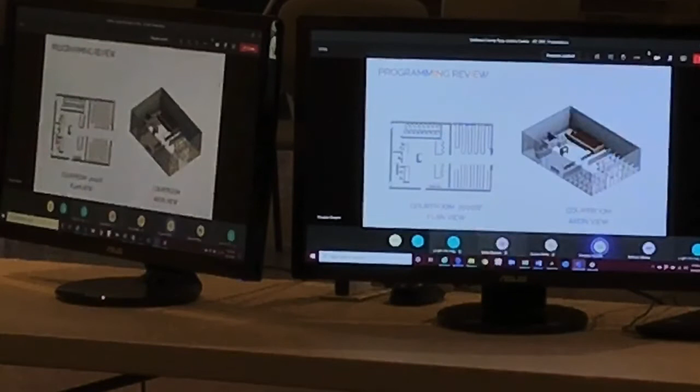So everything that the public would be engaged in, including attorneys, we're making provisions to give ADA compliance. So we have space for wheelchair seating in the gallery and the jury, accessible ramps to the witness box and the jury box. Even the clerk's positions are all accessible within the room itself.

We have a second kind of judicial space, which is a smaller hearing room, kind of a multi-purpose space, but again, similar logic in terms of how it's going to be designed and laid out. This is a simple plan axonometric of how that space might work.

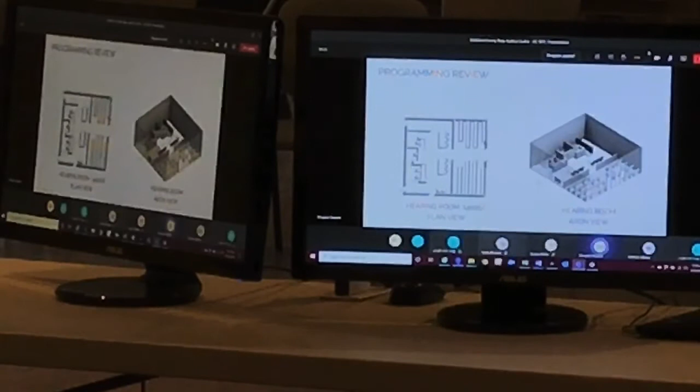The other large space within the building is a jury assembly. That breakdown includes a check-in station, a small kitchen, and a variety of spaces for potential jurors. There are some carrels, and some more auditorium style, maybe incorporating some lounge seating in there as well. But we find these to be kind of multi-purpose.

These spaces are going to have the capability for audio visual in there. They get used a lot for training. There are a number of functions, really a nice asset for the county to have and utilize in a number of ways. But it is also the cornerstone of the juror experience, and they're part of it in the building.

Any questions about the basic program? Again, we can make those spreadsheets available, and we can drill into it if you'd like to. But round numbers, we're looking at 56 to 58,000 square feet total square footage to get everybody in one new building that has capacity for growth.

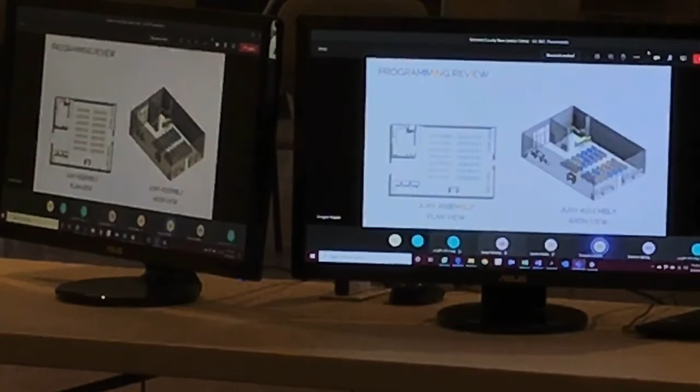Let's keep rolling here and look at the site, the parcel. Linda, I don't want to put you on the spot, but do you want to maybe just do an overview of our analysis of the site? Sure, I can.

Currently runs through the middle of the site, including some overhead power and sanitary sewer lines that will have to be relocated no matter really what building we do.

And then we always had the question, will our buildings that we're programming out, and the parking needed for it, actually fit on the site? So we looked at it from that standpoint too. Will everything actually fit?

Trying to find the most efficient building layout, we did a study of the amount of parking we think we will need, and we analyzed that in three different ways. We looked at what we typically do for courthouse projects, because we've got considerable experience throughout the country that we can use as comparable. Certainly Haywood County is one of them.

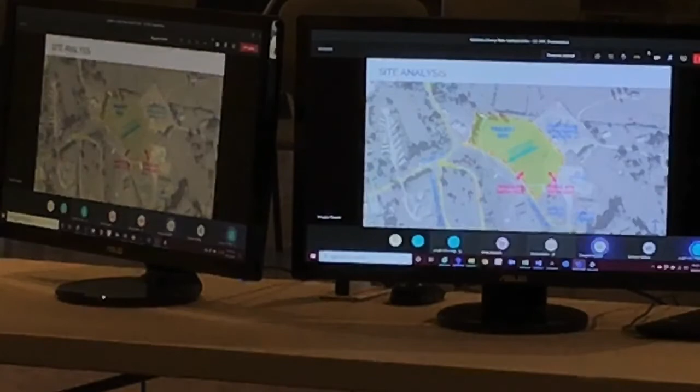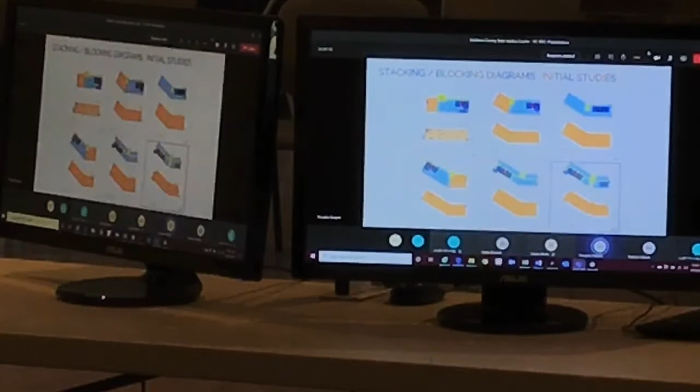So let's look at how some of this might come together. We studied a number of different ideas, a number of options that looked at how you take your base program and put it together in a functional, efficient footprint.

Again, we're conscious of the slope, so we're envisioning the buildings kind of nested into the site, and we're using part of the building to, in effect, retain. It would present itself as two stories perhaps on the street frontage, but on the other side might be a single story. Then we're just trying to be efficient about how that would work.

It lends itself to these linear options, and it also lends itself to a division that might be logical or at least obvious. In these diagrams, the orange colors represent the sheriff detention, the blue colors represent the courts, kind of simplistic, just courts and court support, and the yellow being the public circulation.

For us, it made sense to take that detention and the potential of some of the sheriff's operations and place those on the lower level, and then have the courts on an upper level. We also looked at...

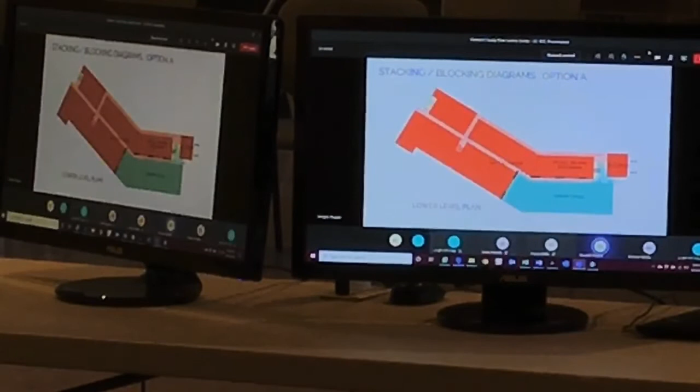We have programmed the Sally Port to maintain secure movement in and out for this. In this case, the Sheriff's Department, the Sheriff's Office proper is placed on this lower level. And there's some advantages to having them and their parking, their need for separate parking, segregated to a lower level.

That also translates into the plan. Here's a three-dimensional view of that diagram. We've now turned your orientation, so you're looking at it as if you're uphill, and you see the two floors. We have provided stairs for exiting, and there are some elevators to move...

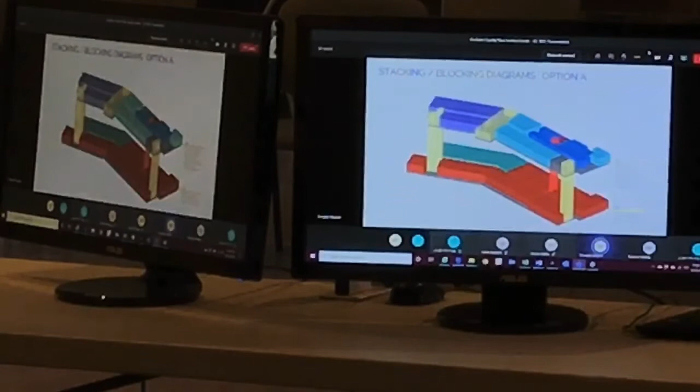Some movement up and down depending on how we're servicing the building. Again, we have the courts. There's a dedicated elevator in the red zone that would bring custody up to the courts, and it's actually in a shared spot between the court and the hearing room. That's really our best practice. We keep everybody separated: public, staff, as well as in-custody movement. Everybody's separated, and they really would only come together within the courtroom proper.

And so that's option A. Option B is very similar organization. It's just a more straightforward, linear configuration.

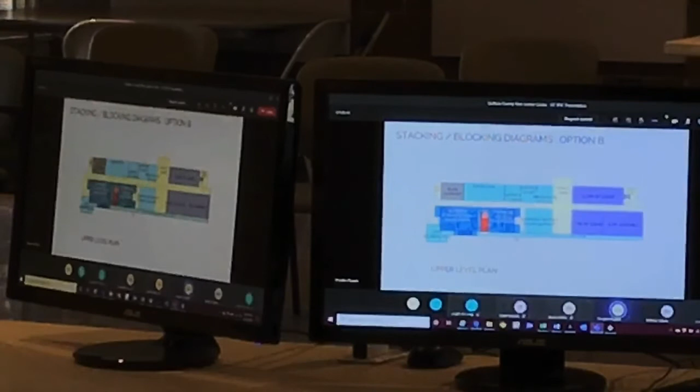Again, the courts on this bar, we have the requisite chambers, some support space, dedicated circulation so that you can move from chambers into court. You don't pass the public realm. The clerk can move in a private circulation to the court. And again, it's all about maintaining secure operations for each of the different populations that are moving in the building.

And then this has the same organization about the jail and the sheriff on the lower level. So here it is in a linear configuration, option B.

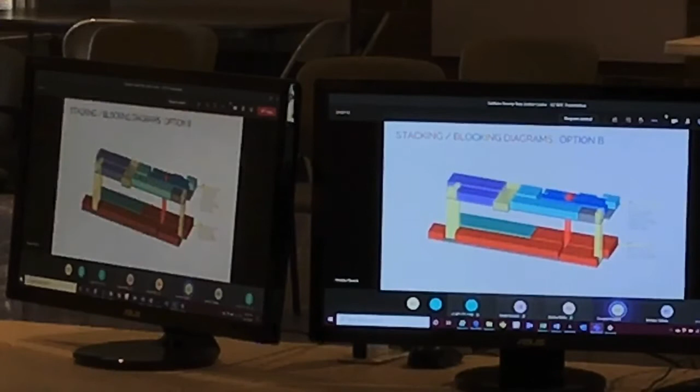Again, we've looked around, kind of looking at the entry side or the top side of the building. And then we also looked at a way to organize the building that is maybe a little bit more sympathetic to some of the contours. So this places this angular form with the same organization and same distribution.

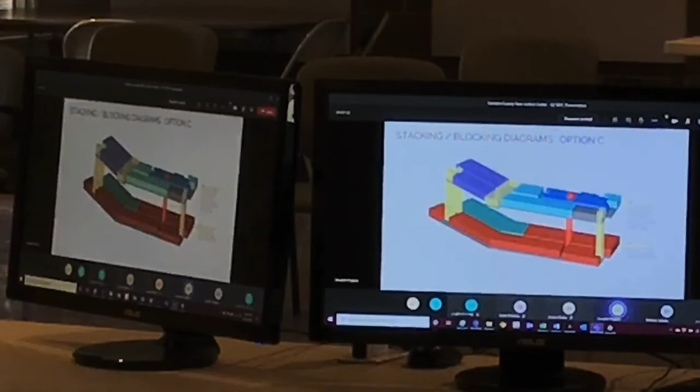So let me show you how these all come together. And we looked at how to best utilize the site. And we studied a number of options. But where we landed was to place...

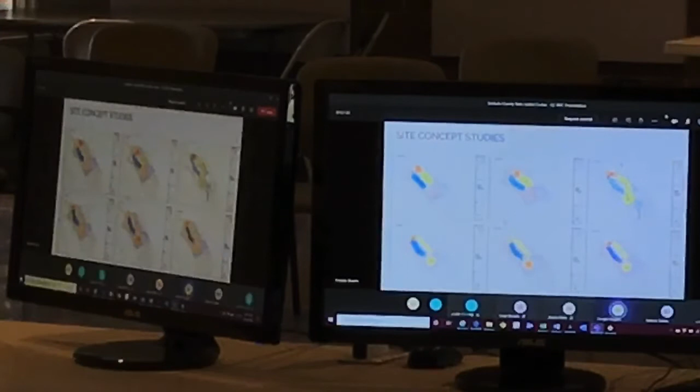Here those three footprints now illustrated to scale on the site, as well as the square footages associated, or the footprints associated with the requisite parking. And diagrammatically, the way this works, there's kind of an upper shelf or upper tier that takes the access...

Really off of that leg that comes by the senior center, the mid-site, if you will, and it's up high. And so we get a plateau or a shelf of parking that's up high. The building is then accessed at the second floor. You drop down with the contours for the lower floor, and then that's served by a lower parking lot. That's where we also separate our...

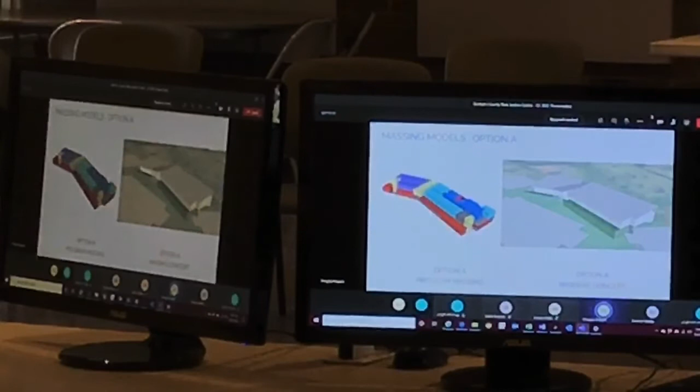Starts to look at how that massing might come together, where we have a single story. This now looks at it from the parking side. So a single story on the upper level, double story on the lower level. You can kind of see how the building bridges between high and low. It's pretty simplified massing modeling.

But a couple of things I think to note is that it takes a good deal of the site. There's not a lot of leftover. I think there is room to expand. I think there's things you could do to grow this building on the site, but we are using a good chunk of it in order to satisfy these programmatic needs.

So we actually looked a little bit harder at these next two options. We're going to take a little bit further dive into how they might be developed. The logic, again, has this double-loaded bay parking on the higher shelf, all funneling to a primary building entrance. And then the main facade is out on the roadway.

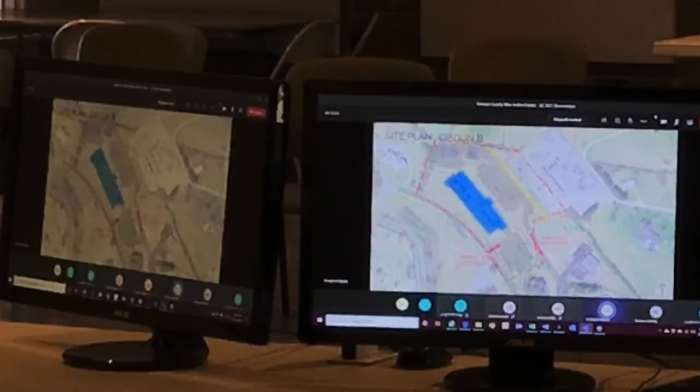Again, this is still preliminary, but the idea of introducing that colonnade that announces the public entry from the top. These views are now from the public side. Clearly, it's a single story up here, and everybody's funneled to the primary public entrance.

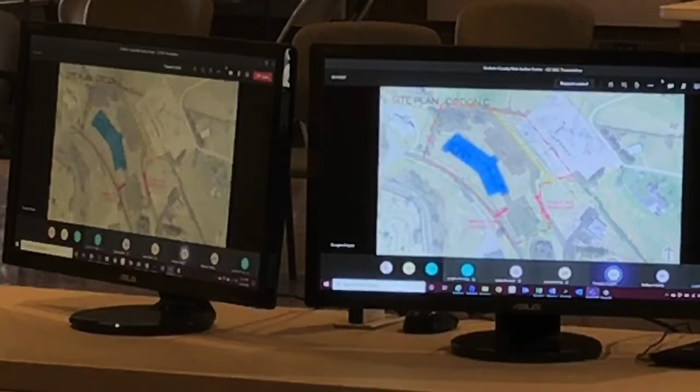So the little wrinkle here is this: it's hard to represent, but the contours actually have this kind of natural bend, not unlike the bend in the road. So this is tuned to that, so the lower footprint of the building on the lower level nests perfectly into the contours of the site. We'd have to verify some of this data since it's extracted from a couple different places.

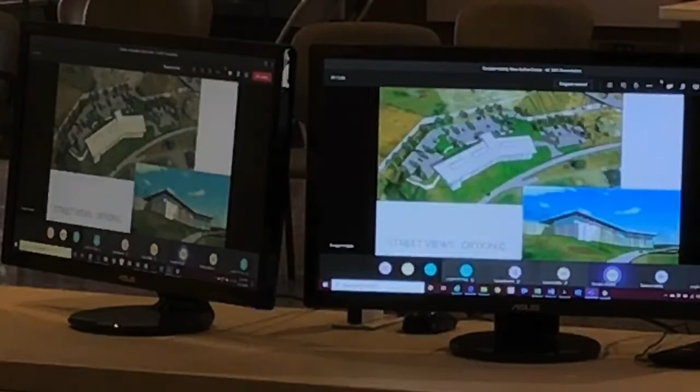On the public side, we're announcing that entryway as a separate form and mass with columns—that's the collector that brings it all in. We studied in this model the idea of sneaking some clerestory lighting along the public spine within that upper level.

There's lots of room for us to develop these architecturally, but what excited us is that there are really interesting ideas that could work with the building form and the site. They lock together in a way that makes sense—it's a pretty efficient use of the site. We believe this may be one of the most efficient ways to fit the program on this site, and it's a logical separation of courts versus the detention and sheriff's component.

That is our analysis to date.

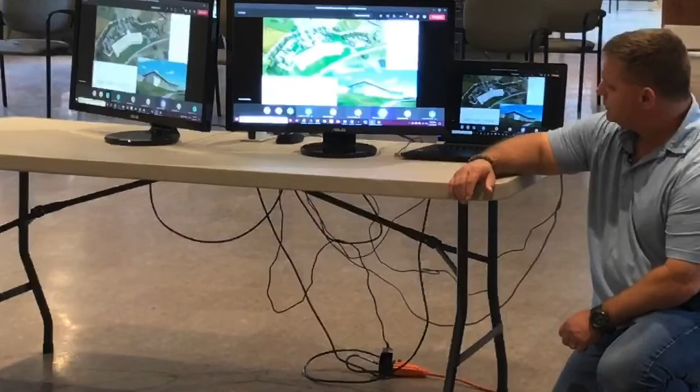But we were looking at a combination of that masonry, where we could introduce some of that stuff, part of the existing court, and then areas of glazing in between. So again, more of a punched masonry, and that would lend itself to how we would introduce the smaller scale windows associated with the detention at the lower level.

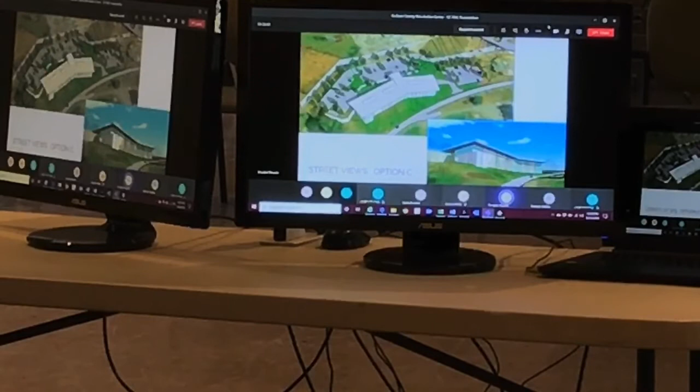And so that's the other thing that this plan does, there's this little bump on the plan. That is our jury deliberation suite, which again, when we think about courts, we think about honoring how the public are participating. So it's nice that we have this space out there that gets lots of light for them, and honors and celebrates public participation in the process. But I think there's a lot of room for how we can develop that expression along Fort Hill.

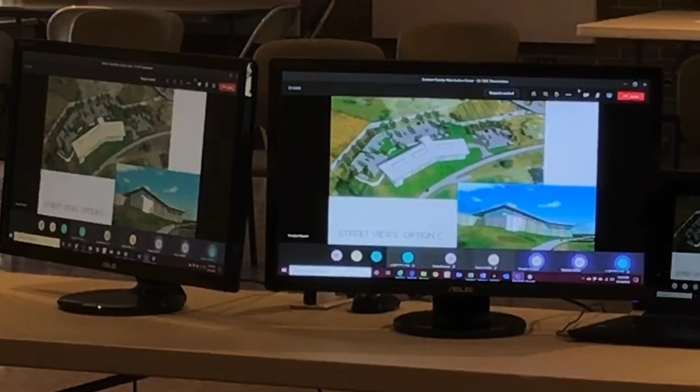I don't like that. I don't like the front of the building, it basically looks like the back. You're going to have a big retaining wall, and above there you've got the Duke Energy substation. To me, the street side of that building should be the side that says, hey, this is the Graham County Courthouse, instead of having to drive around behind the building.

That's certainly something we can look at and talk about, making it more appropriate for a look of Graham County and the court system as you drive up the hill. We could look at the facade having some attributes of that, correct? I can see it from here.

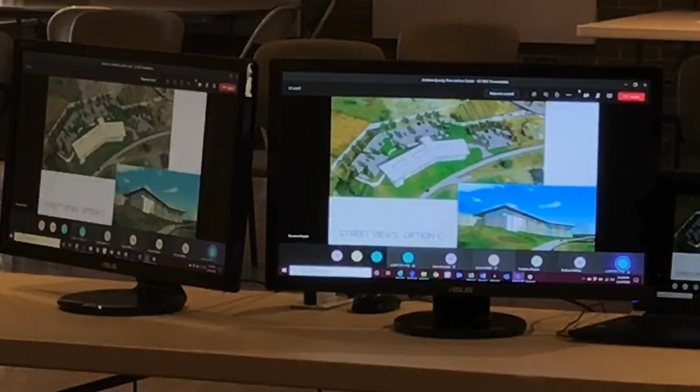I had a little trouble hearing, but I think your comments, at least for what we've developed so far, are a valid criticism, that it may not have enough articulation. If I were to criticize it, it may just be a little too generic, and if it's a civic building, we may need a little bit more articulation, a little bit more energy.

It's easy on the top side with the entryway and columns. Those are kind of classic markers, and really align with how many of us think about the justice center. It's a bit more literal reference to the existing building, but it's a little less so on the side.

It's a valid concern, and again, this is really more of a test fit than a design. I think that if we were to select this or go forward, there's plenty of room for us to make this feel appropriate for a county building and for the justice center. I think there's some opportunities here, but I would agree that we haven't quite pushed it.

My perception of it is that it's backwards. If you could turn the back side around to the front, which I'm not sure the space would accommodate, but that would be what I would want to see. To me, it would look better if that was facing Fort Hill Road.